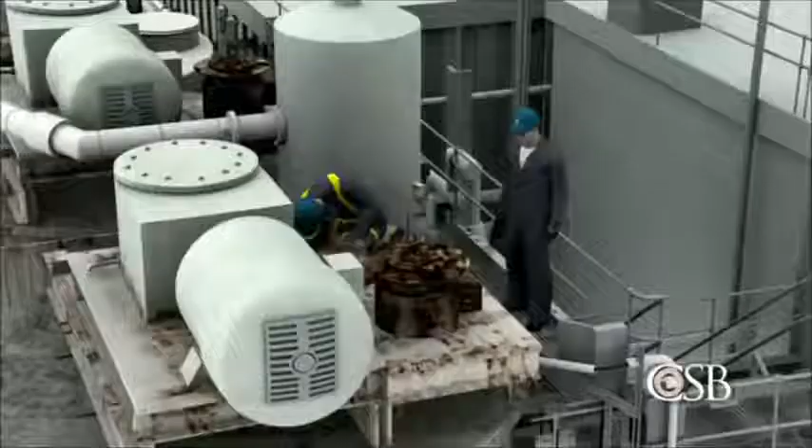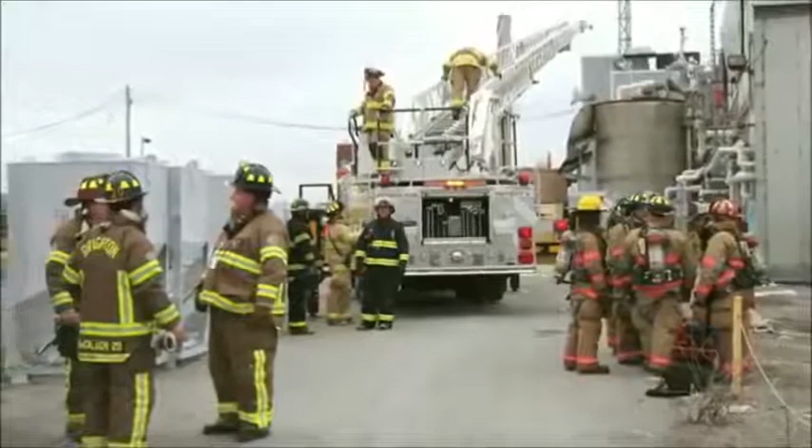On November 9, 2010, a powerful explosion shook the DuPont chemical manufacturing plant in Tonawanda, New York, a suburb of Buffalo. A contract welder was performing maintenance work on a tank that, unknown to him, contained flammable gas. The explosion blew the top off the tank, throwing the welder to the ground and killing him instantly. A second contract worker was burned.

Hot work accidents occur when workers are welding, cutting, or grinding near flammable vapor.

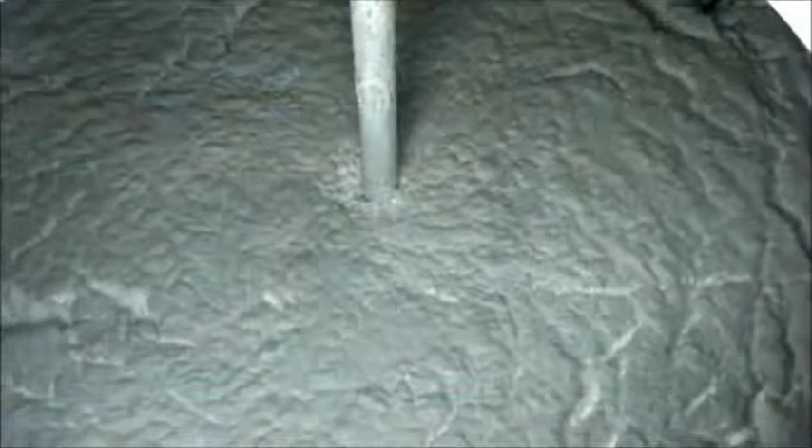DuPont's Tonawanda facility manufactures a polymer known as Tedlar, used in solar panels, and Corian for use in countertops. The process of producing Tedlar began with a chemical reaction to convert flammable vinyl fluoride gas into a slurry of polyvinyl fluoride polymer, or PVF, in water.

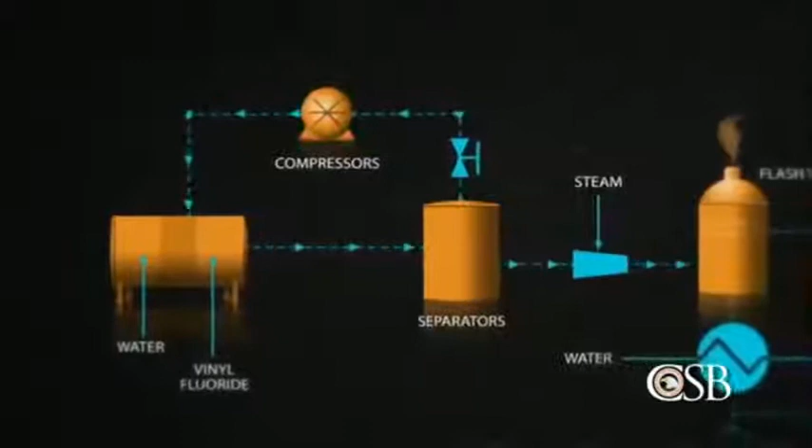The PVF slurry then passed through separators. Compressors recycled unreacted vinyl fluoride gas into the process, while a small flash tank released residual vinyl fluoride into the atmosphere. Finally, the slurry was transferred to one of 3 insulated holding tanks, usually tank number 3. Tanks 1 and 2 were reserved for slurry overflow. Tank 1 normally remained empty.

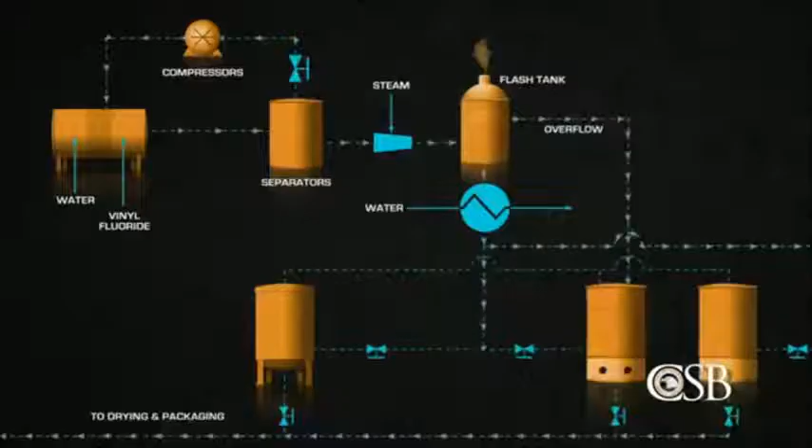October 22, 2010, the Tedlar process underwent a planned shutdown, during which workers removed the asbestos insulation on tanks 1 and 2. Removing the insulation revealed that the agitator supports for the tanks were heavily corroded. DuPont directed contractors to repair the supports, which would involve welding and grinding on tanks 1 and 2.

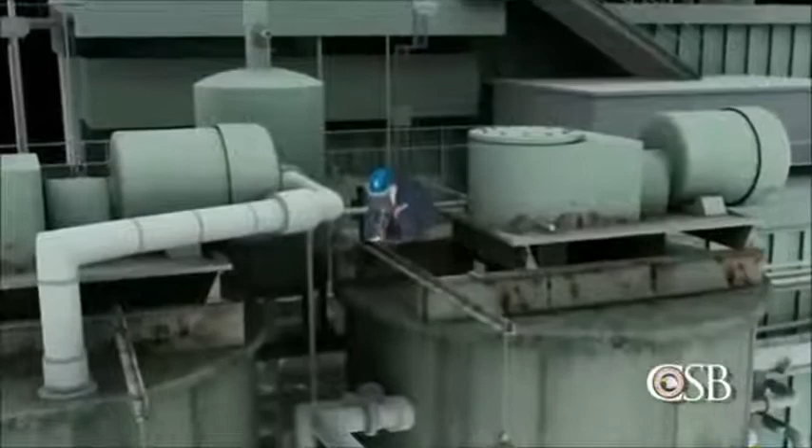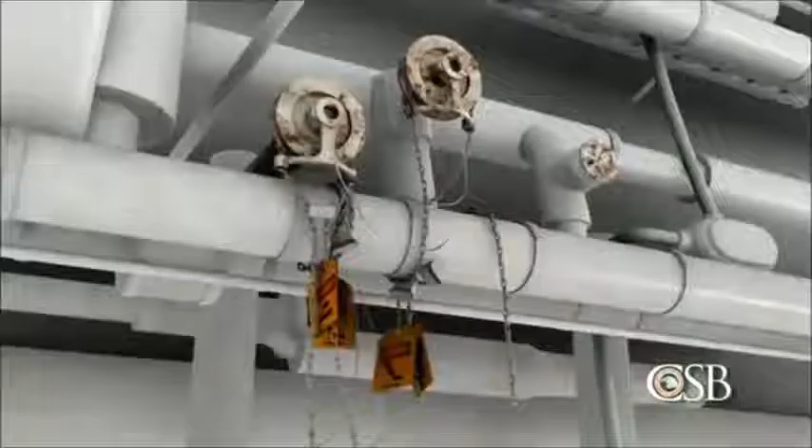The hot work on tank 2 occurred during the shutdown without incident, but the repairs on tank 1 were delayed while parts were ordered. DuPont personnel determined that it would be safe to perform hot work on tank 1 after the restart. On November 7th, DuPont operators locked all 5 valves leading to and from tank 1 in the closed position in order to stop potential slurry flow.

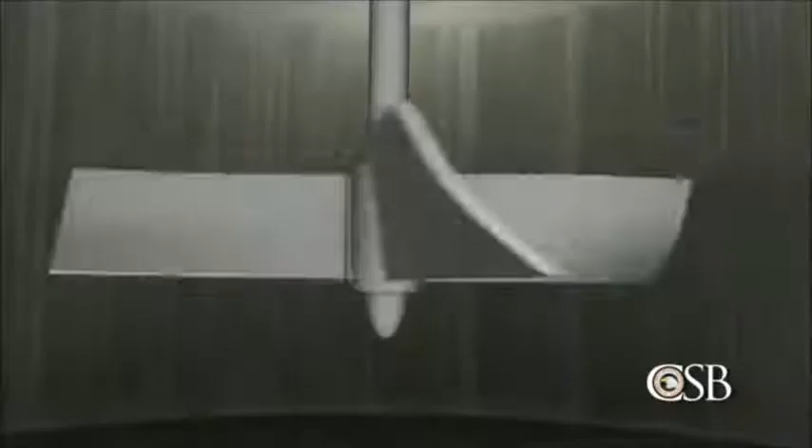The tank's agitator motor was also locked out. However, DuPont personnel did not block the flow of gas inside the overhead piping, or overflow line, that connected the vapor space of all 3 tanks. They mistakenly believed that flammable vinyl fluoride gas could not reach any of the slurry tanks.

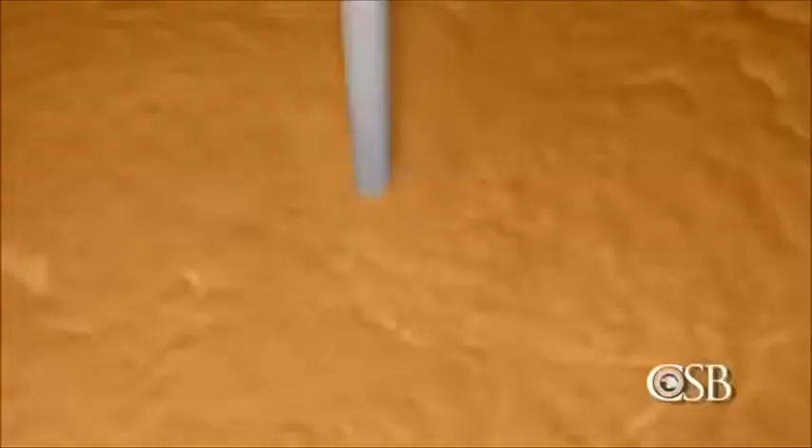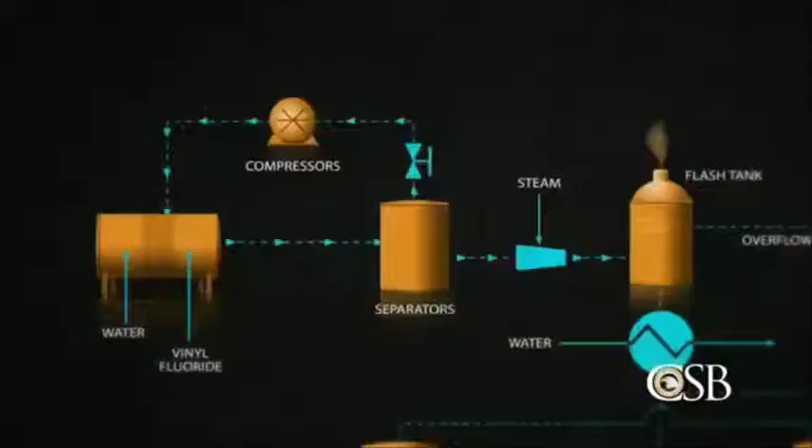But the CSB investigation found that even in normal operations, vinyl fluoride was not completely removed from the slurry and was always present in the slurry tanks in varying amounts. When the process restarted on November 6th, the flammable gas was able to travel from tanks 2 and 3 through the open overflow line into tank 1.

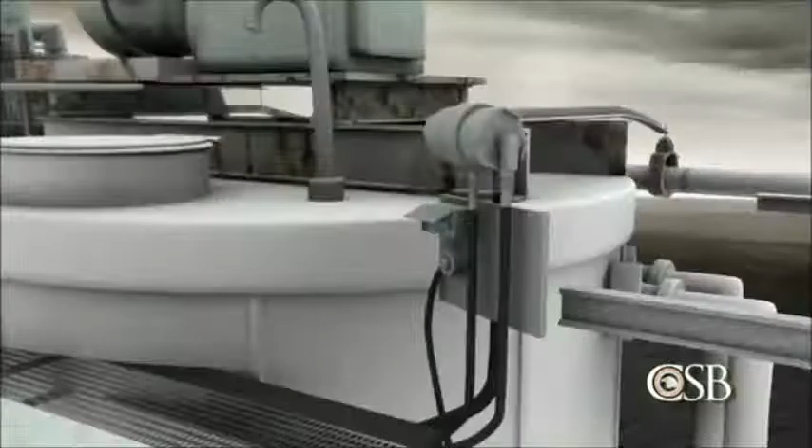On the morning of November 9th, a DuPont technician tested the atmosphere above tank 1, where welding would later take place. There were also 2 continuous air monitors in the vicinity. No flammable gas was detected, and the hot work was cleared to begin. But no testing was done to measure or monitor the atmosphere inside the tanks, where, unknown to the contractors, the flammable gas was at dangerous levels.

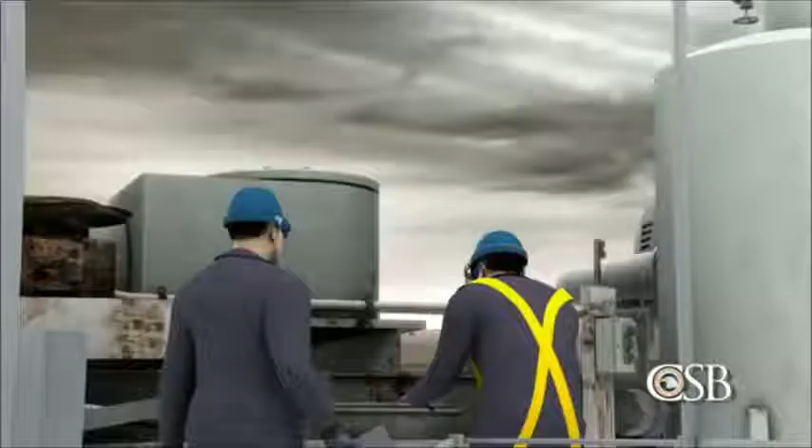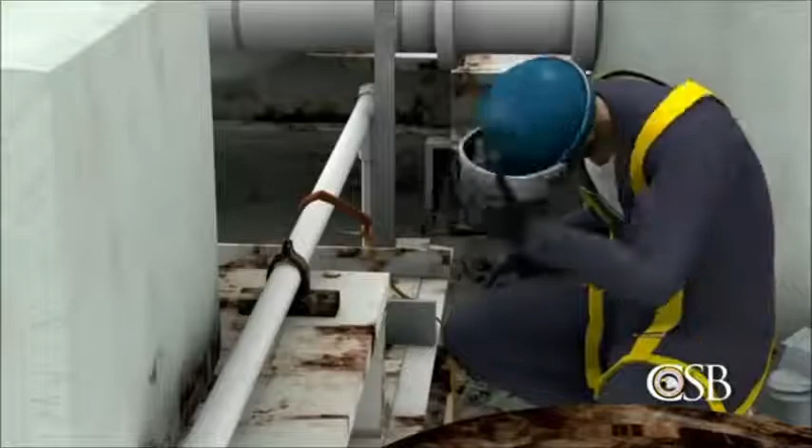Around 9 a.m., 2 contract workers began welding and grinding on tank 1. The welder connected his safety harness to the tank's agitator support and worked on top of the tank as the foreman looked on from the nearby catwalk. At approximately 11 a.m., the welder was repairing corroded portions of the agitator support beams directly above the flammable gas.

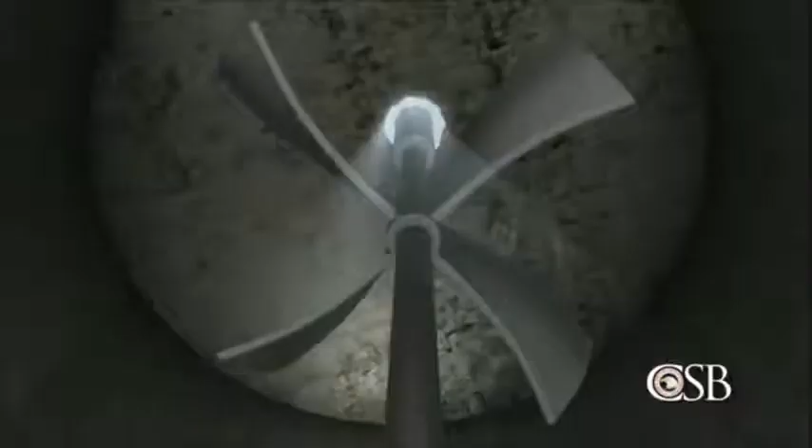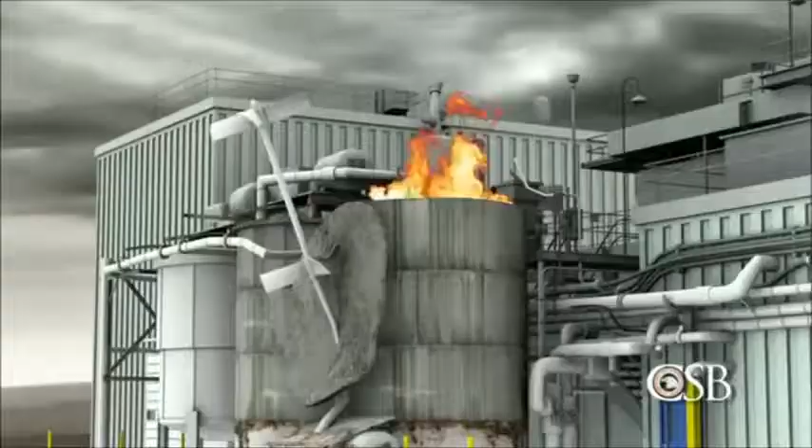A hole around the agitator shaft may have provided a pathway for ignition. Welding sparks could fall into the tank, even as flammable gas might drift upward toward the sparks. The ignition of the vinyl fluoride caused a powerful explosion. The force of the blast blew the top of the tank almost completely off. A flash fire erupted that consumed the flammable gas and quickly burned out.

The welder was thrown to the ground, killed instantly from blunt force trauma. The foreman's face and arms were burned.

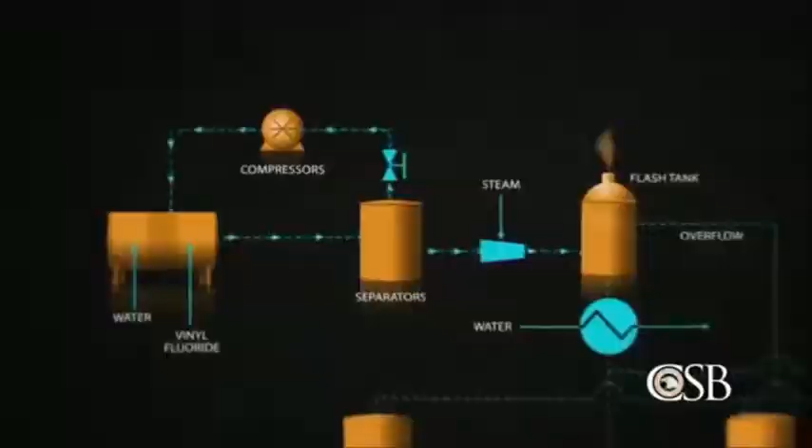DuPont regarded most of the Tedlar production process as covered under the OSHA standard for Process Safety Management, or PSM, and therefore subject to stricter operating and maintenance requirements. But DuPont personnel did not include the slurry tanks in the facility's PSM program. In a 2009 process hazard analysis, DuPont erroneously concluded that flammable vinyl fluoride gas could never reach the tanks in dangerous quantities.

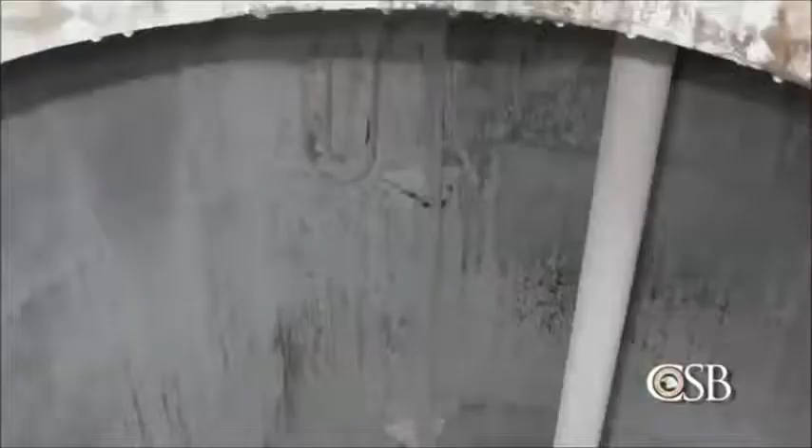Two additional factors may have contributed to the tragedy. Prior to the explosion, DuPont personnel had discovered that slurry tank number 2 had a hole in a liquid trap, which was designed to prevent the flow of gas from the flash tank. Without a liquid seal in the trap, there was an additional pathway for vinyl fluoride gas to flow into the tanks. However, this hazard went unrecognized, and DuPont engineers concluded that it would be safe to return the tank to service. No formal management of change review was conducted.

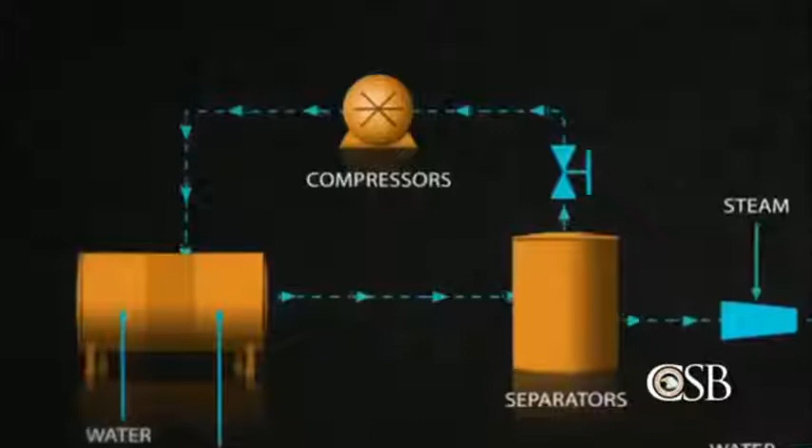Further adding to the danger, on November 8th, there was a malfunction in a compressor used to strip vinyl fluoride gas from the PVF slurry. As a result, the slurry contained more than the normal amount of vinyl fluoride. Once again, DuPont personnel did not formally analyze the safety impact of continuing to operate with a malfunctioning compressor.

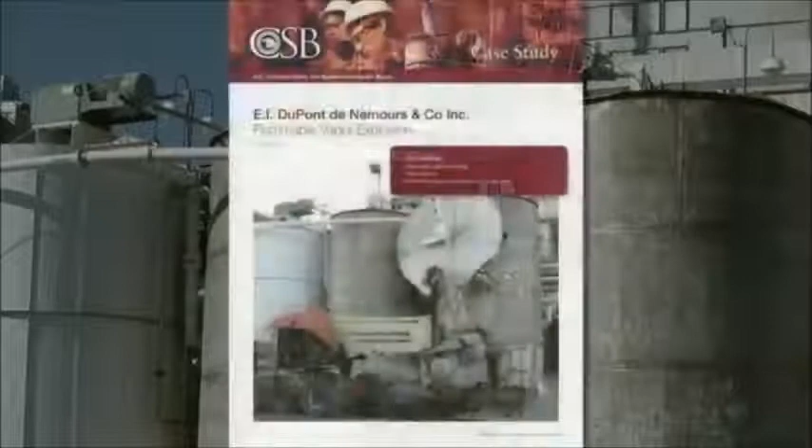In its final report, the CSB recommended that DuPont revise its corporate policies to require atmospheric monitoring inside tanks before and during any hot work. And the board recommended that DuPont require all process piping, including vent lines on tanks, to be positively isolated before authorizing any hot work.